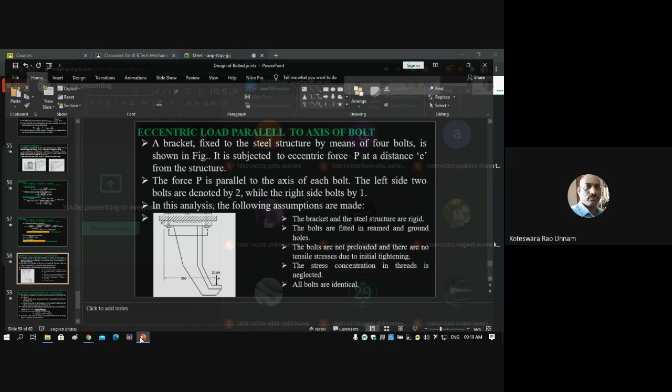So we'll discuss the last topic in bolted joints today. So far we've seen two different cases. One is when the eccentric load is in the plane of the joint. The other case we considered is when the eccentric load is perpendicular to the plane of the joint, and also perpendicular to the axis of the bolt.

So now today we'll see an eccentric load which is in the plane perpendicular to the axis of the bolt, and also the load is parallel to the bolt axis. See, you can see in this diagram now. Here, this is the plane of the joint, and this load is perpendicular to the plane of the joint, and also the load is parallel to the axis of the bolt.

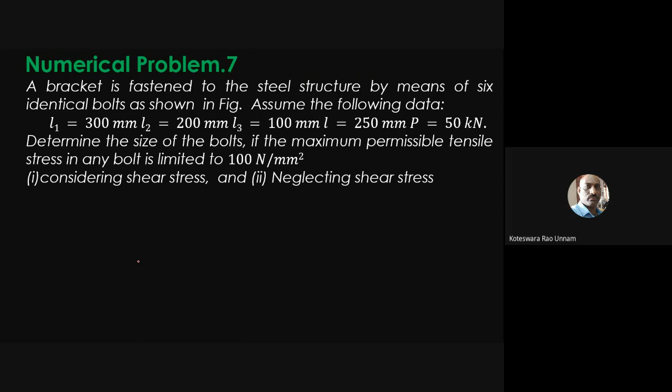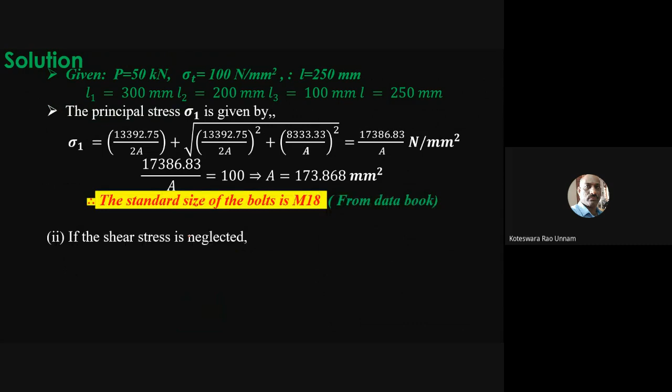So now, like in the earlier two cases, here also what you need to do is look at two conditions. One is what is the effect of transferring this force to the centroid of this bolted system. In that case, you need to find out what is the direct load and what is the moment. Again, we need to look at what is the nature of stress because of this direct load, and what is the nature of stress because of the moment. In our previous two cases also we analyzed like that, so in this case also we'll analyze in the same manner.

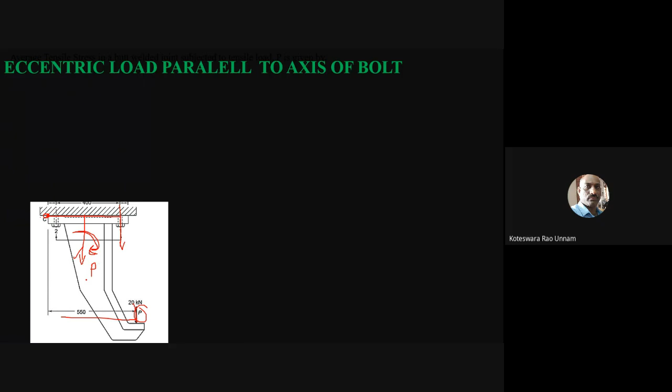So that means because of the direct force there is a normal stress, and because of this moment also there is a normal stress. So these two forces will create a normal stress in these two bolts. We need to add those two stresses so that we get the total normal force, and from that you can find the dimensions of the bolt. Now we'll see that step by step.

So a bracket is fixed to the steel structure by means of 4 bolts. Here you have only one view. At this location there are two bolts, and at this location also there are two bolts, as shown in the figure. It is subjected to an eccentric force P at a distance E from the structure. From this point onwards it is subjected to an eccentric force P, parallel to the axis of each bolt.

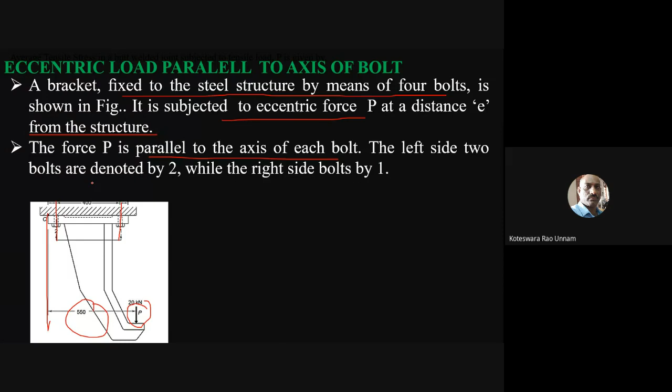Like we already discussed, here this load is parallel to the bolt axis. The left side two bolts are denoted by 2. So here, whatever two bolts are there on the left side, they are denoted by 2, and on the right side they are denoted by 1. So now, similarly to the previous analysis, here also we make some assumptions.

Those assumptions are the bracket and steel structure are rigid. That's also what we made in the previous case, so only the bolts are capable of elongation. The bolts are fitted in reamed and ground holes - same assumption as the previous case. The bolts are not preloaded and there are no tensile stresses due to initial tightening. Okay, so these are the assumptions.

So what we made in case of this one, even there is no stress concentration, and also we assume that all bolts are identical. These are the same assumptions we made in case of the previous case, when the load is acting perpendicular to the axis of the bolt - here also the same assumptions hold good.

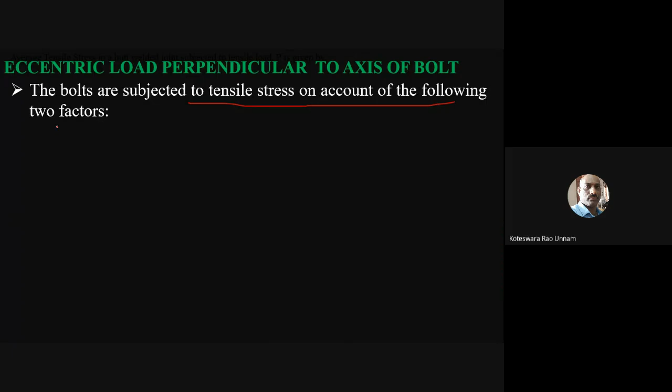So now with these assumptions, we'll try to find out the effect of this eccentric load on these bolts. The bolts are subjected to tensile stress on account of two factors. One is direct tensile stress because of force P, which is parallel to the axis of the bolt.

So that means the direct force will create a tensile stress, that's why we call it direct tensile stress. Then a moment will be created, and that moment will also create a bending stress. So tensile stress, bending stress is nothing but a tensile stress. Maybe sometimes it is also compressive, but we'll consider only the positive stress value because this is tensile. So in order to get the maximum stress, you need to consider positive tensile stress.

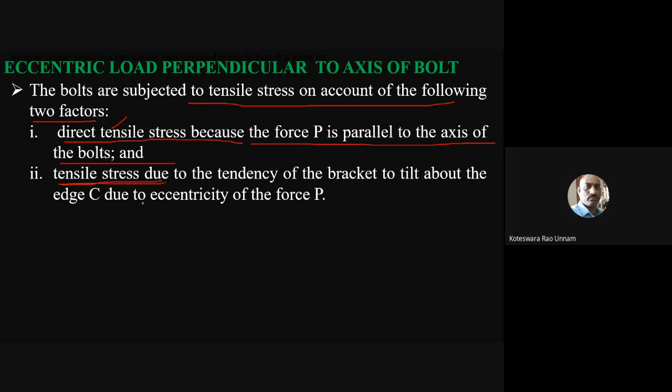This is due to the tendency of the bracket to tilt about the edge C due to eccentric force P. Since our assumption is all bolts are identical, meaning the size of the bolts is same, the total direct force is equally shared by all the bolts. Therefore your P1 dash and P2 dash is nothing but the direct tensile load on each bolt, given by P1 dash and P2 dash. P1 dash is the tensile load on the first set of bolts.

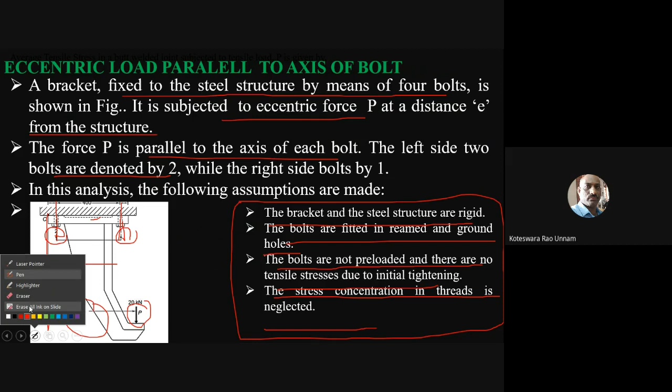So now the magnitude of this P1 dash or P2 dash is going to be the same, and also equal to P divided by the number of bolts, where N is the number of bolts. So here in this case, total number of bolts is 4, so you have to take P by 4. Suppose you have more than 4 bolts, or some other number of bolts, you have to take that total number of bolts.

So don't consider the number of sets here. Whenever you calculate the direct effect of direct force, you always need to consider the total number of bolts. In any case, whether it's eccentric load parallel to the axis of the bolt, or eccentric load perpendicular to the axis of the bolt, or the first case also - in all cases, the load is equally shared by all the bolts. You need to consider total number of bolts, not the total number of sets of bolts.

Okay, so only the number of sets comes into picture in case of a bending load or bending stress. Okay, right, so that's why here we'll take this. In this case, P1 dash and P2 dash is nothing but... so why do we consider only these, even though you have 4 bolts, here we said P1 dash, P2 dash. We haven't calculated P3 dash and P4 dash - why not?

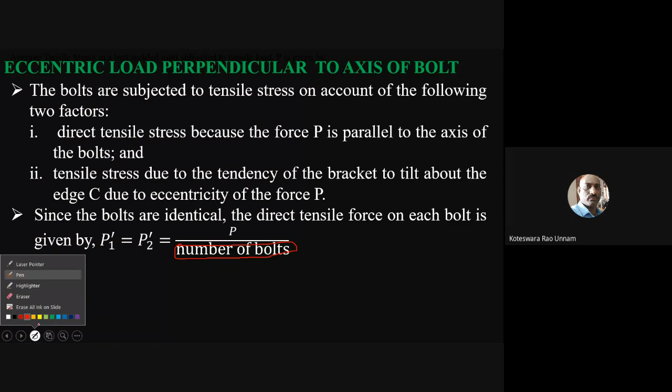So then the tensile force due to the tendency of the bracket to tilt. We know that the bracket is going to tilt about this point, about point C here, because of the eccentric load.

Because of that, if the bracket is tilting in this clockwise direction, this bolt will elongate in this direction, and even this bolt will also elongate in this direction. But since the bracket is tilting, originally it was like this, and this point is tilting to something like this, so this much is the elongation for the first set of bolts, and only this much is the elongation for the second set of bolts.

If I take this as delta 1 and this as delta 2, delta 1 is larger compared to delta 2. Why is delta 1 large here? Since this point or this axis is far away from the tilting point. Here our tilting point is C. This is the distance for the first set of bolts, and only this is the distance for the second set of bolts. The distance is very small from the point of tilt to the axis of the bolt.

So therefore, you always need to consider the bolt which has the highest deformation, or which is far away from the tilting point. We won't consider this one; we'll consider only this set of bolts because these bolts are far away from the tilting point.

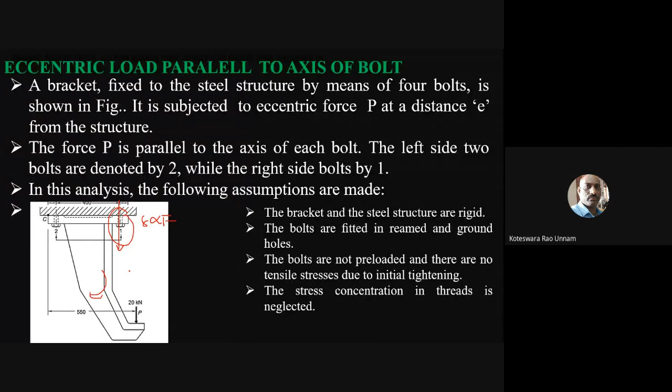We already saw this in the previous class. If you apply the same procedure here, you will get the same expression as before. Your P1 double dash is going to be PE into L1 divided by L1 square plus L2 square. And P2 double dash is nothing but PE into L2 divided by L1 square and L2 square.

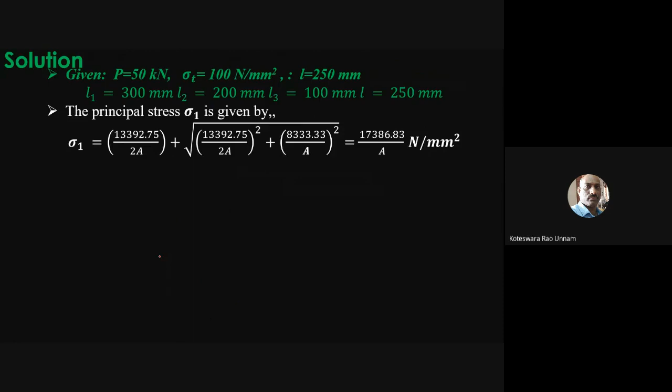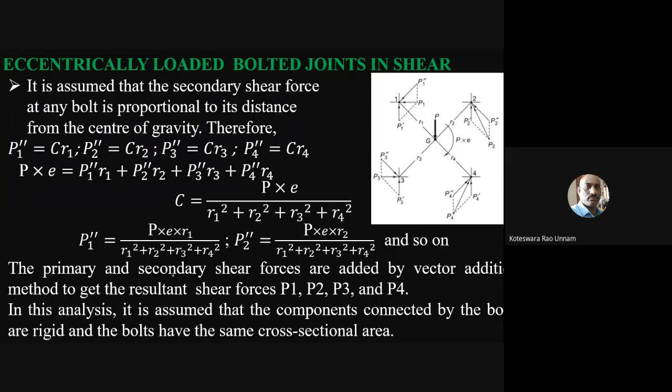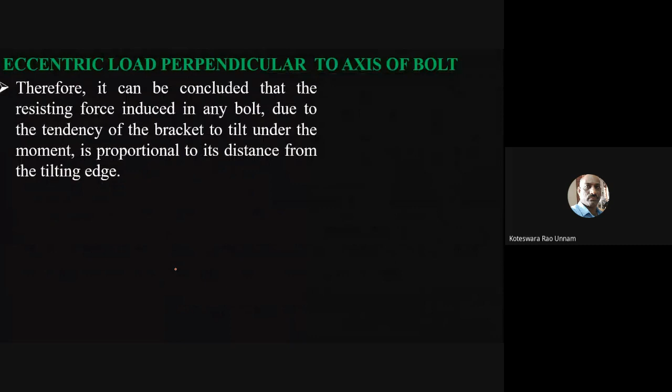I think a 2 is missing here. If you go back to the earlier derivation, in the case of bending moment, your expression for this one should be 2 times something like this. Here the formula should be 2, and here also the formula should be 2.

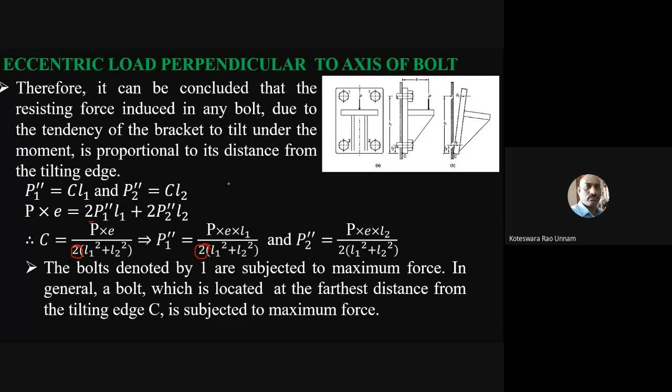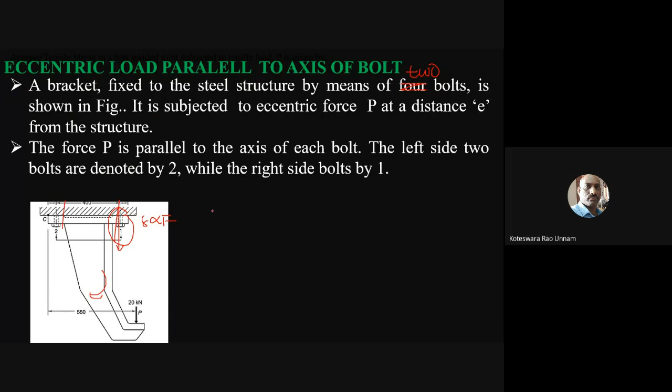If there are 4 bolts, but suppose if you have only 2 bolts, then it's okay—be careful about that. In this case, I'm not sure how many bolts there are, only 2 bolts are there. So instead of 4, if I take this as 2, meaning here I have only 1 bolt and here also only 1 bolt, then the formula becomes: PE into L1 by L1 square plus L2 square, and P2 double dash is nothing but PE into L2 divided by L1 square plus L2 square.

Suppose instead of 2 bolts, if I have 4 bolts like I said earlier—at this location you have 2 bolts, and at this location also you have 2 bolts—then you need to consider the equation with 2 here and 2 here. If there are 3 bolts, you consider 3 here and 3 here also, because all the bolts are at the same distance from the point of tilt. So you can take it as 3 times. If it is only 1, it's L1 square plus L2 square only; if there are 2 sets, take 2; for 3 sets, take 3.

So like that, we can determine the tensile force acting because of the moment on this set of bolts. Once you've calculated this, this is a tensile force P1 dash, and this is also a tensile force. We also know that the bolt located far away from the tilting point is subjected to the maximum tensile force because of the tilting of the bracket.

You need to consider that. Since both are tensile forces, you simply add them to get the total tensile force acting on each bolt. That means you add P1 dash and P1 double dash, provided your P1 double dash is the highest tensile force. If not, if P2 double dash is the highest force, you add P2 dash to P2 double dash, and so on.

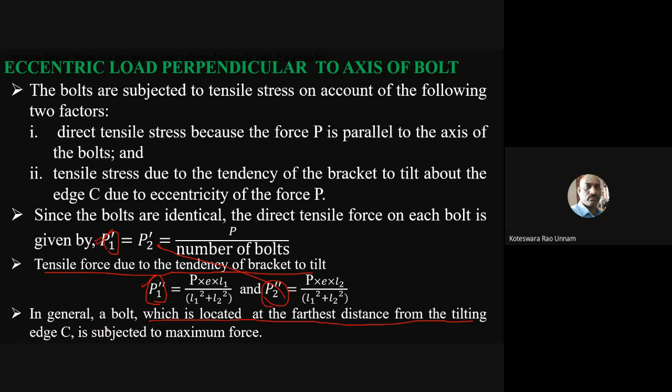So like that, you can solve the problems. Once you got the resultant, in general, the bolt which is located at the farthest distance from the tilting edge C is subjected to the maximum force. That's what we already discussed. So then the resultant force is nothing but the summation of those two.

So in this particular case, bolt 1 is farthest from the tilting point C. So while finding out the resultant tensile force, I'll consider only the forces acting on bolt 1, which is going to be P1 dash plus P1 double dash.

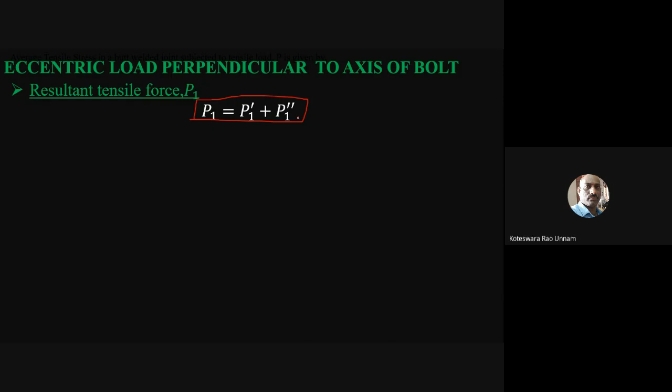So once you got this, you can use your design equation, that is sigma 1 equal to P1 divided by A, where P1 is the resultant load in bolt set 1, and A is nothing but area of the bolt. From this you can calculate the area, or area is nothing but pi by 4 dc square. So sigma 1 will be given to you.

So then we calculated P1, and from that first we can calculate A. From A you can calculate dc. Once you got the dc value, you can pick the standard diameter, or you can find D as nothing but dc by 0.8. So from this we will get some value, and according to this value, you have to choose the standard value from the data book. That is the way you need to solve this problem.

Or else the other way is, first we'll calculate only area, and based on this area you can pick the standard diameter from the data book. Whatever may be the area, let us say if I got 100 mm square area by solving this equation, so I got the value for A is 100. Now I'll open the data book and take the last column of table 8.2 or 8.3.

In the table you have to pick the area which is 100 or more than 100. You cannot take a bolt which is having less than 100. So you have to look for the 100 mm area or more than 100, slightly more than 100, or the next number which is higher than this 100. Like that you need to choose. Then you need to identify what is its corresponding nominal diameter, and you can say that is going to be the diameter of the bolt required for this application. Like that you can select for the problem.

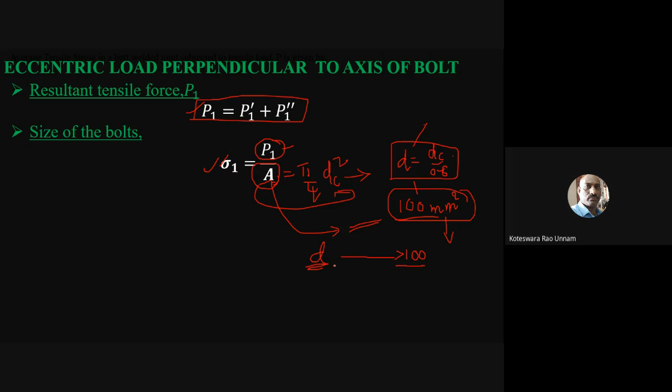Okay, so this is how you can analyze this bolted joint subjected to an eccentric load when it is subjected to a load which is parallel to the axis of the bolt. Now we'll consider one more problem on this, and then we can close this topic. Not only this topic, we'll close bolted joints with this problem. Maybe in next class we'll take up the next topic, that is cotter joints.

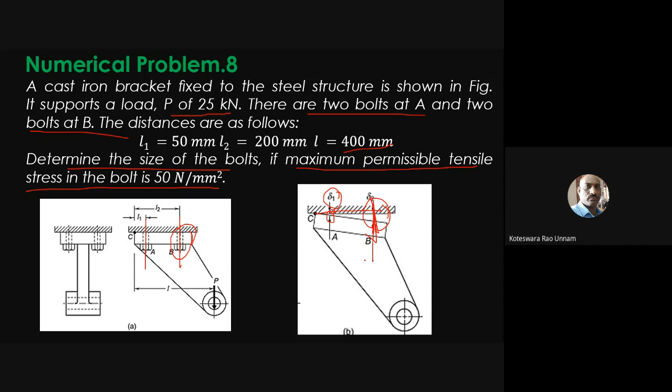Therefore your design criteria should be the bolts located at point B, not at point A. So what you need to do is find out the tensile stresses because of direct force as well as because of bending moment at this location now.

So this is the given data in the problem, we already saw that. Then direct tensile force is nothing but the applied force divided by the total number of bolts. Here we said there are 4 bolts, so the total number of bolts should be 4.

So 25 kilonewtons is the given load, we'll convert that into newtons. Therefore it becomes 25,000 newtons divided by 4, which is 6250 newtons, the direct tensile load on each bolt.

Earlier I told you, because there are two sets of bolts at each location, you need to multiply this formula by 2. If there is only one bolt, you have to take L1 square plus L2 square, but because now there are two bolts for each set, you have to multiply by 2 here.

So he has given L1, L2, everything is given to us, and of course E is given in terms of L, so L he has taken as E. So you substitute 25,000 into E, where E is 400, into L2 which is 200, divided by this one. We get this is going to be the tensile load because of tilting of the bracket, or because of the bending moment created by that eccentric load at bolt B.

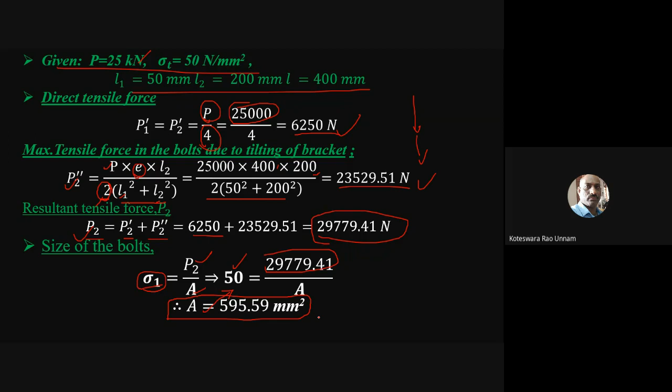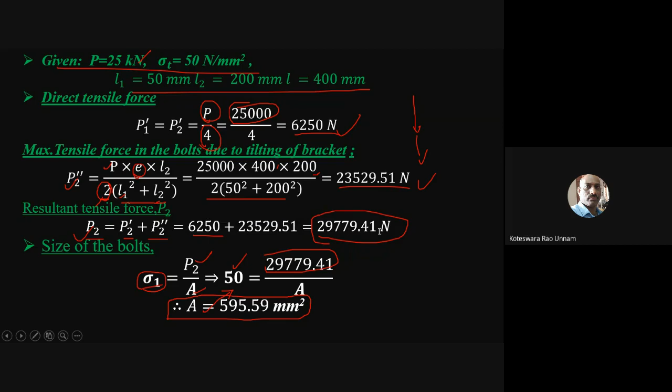So either it should be 595.59 or the next value. Now you look at it in your data books and tell me. You can note it down and also tell me the answer. I've shown it here. If it is in presentation mode, that's okay. Then you open your data book and tell me what is the value.

I'll ask specific people, otherwise nobody will respond. This 330, Ganta Shushank, are you there?

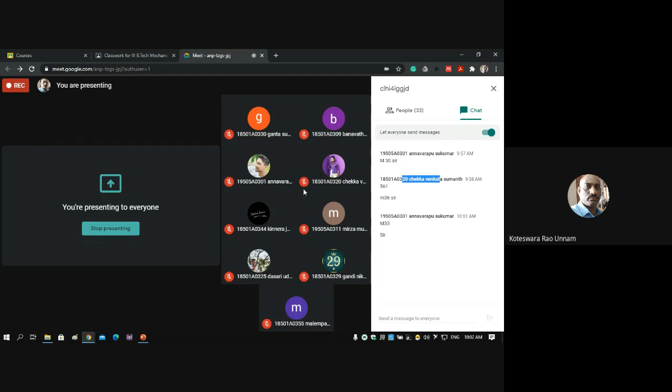So with that we close this topic also. Welded joints also, bolted joints also — so it is over. Now the task is for you.

You have to solve different possible types of problems on this. Take any textbook and do it from there. In the next class we'll take up cotter joints. Once everything is completed and there is time, we'll come back to all these things again. We'll discuss some more problems, but for the time being we'll first try to complete all the syllabus, then we'll come back.

So the answer is this. If you want, note down this answer, then upload it in the classroom.